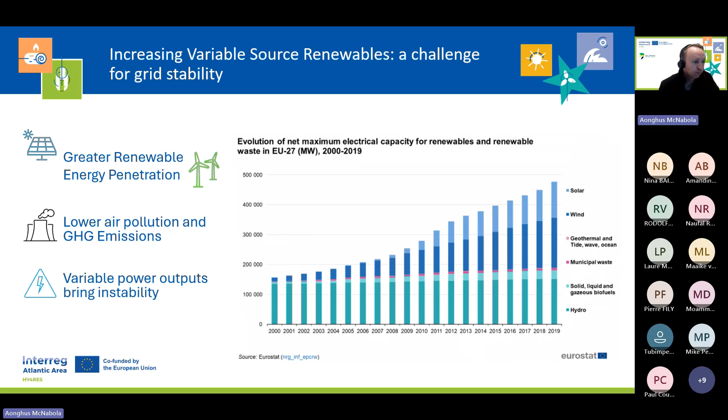But during that time, we had a very high-profile event in Spain and Portugal with power outages related to grid instability that high penetration levels of renewable energy can create if they're not properly managed. And so that proper management of renewable energy in the micro community energy space is where we are targeting. So elaborating on the problem we were trying to address a little bit more.

We have more and more renewable sources in the grid over the last few years, and expect that to continue to be the case. Less conventional energy supply, but also a greater demand for electricity in general. We all see data centers in the news and various other reasons why our energy demand is going up. So not only more variable renewable energies in the electricity grid, but a greater demand for electricity for other environmental policies, such as the electrification of transport and heat, lowering emissions in other ways.

So that means that the challenge of managing the grid, which must always meet demand, becomes more and more difficult, right? So if we think about the dreadful event of a blackout, well, it's not something that happens very often.

And so the challenge of someone managing an energy grid with sources which are much more variable becomes much more difficult in the modern era. So that also is more of a stark challenge in rural areas where the grid is generally weaker.

And so what essentially we mean by that is, if you think of the grid or the arteries of our electricity system as they spread to rural areas, they tend to be towards the end of the line, and the capacities are smaller to carry local energy. And so it's a different challenge to manage variable renewable energy sources there than it is in big cities. And that is where HY4RES focuses, on hybrid solutions at local community level.

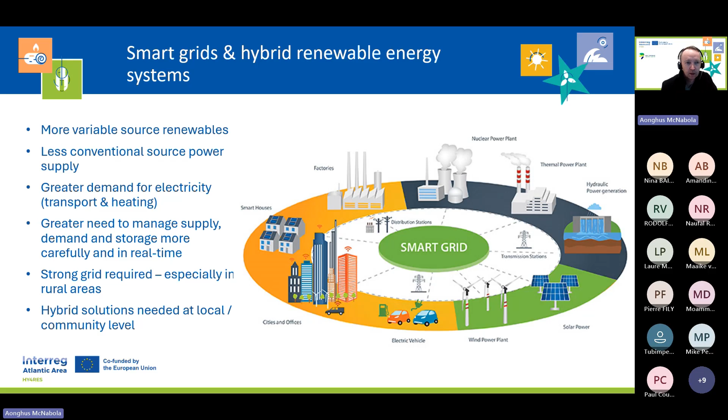There is also a geographic dimension, as I hinted at the start, to this problem. So we are part of the research response to the policy position here through the Interreg Atlantic Area Programme, which has a focus on largely rural areas in the Atlantic area of Spain, Portugal, France, and Ireland. And the amount of renewable energy resources in terms of wind and solar and hydro are different in those places. So the same solution doesn't work in all of them.

But one of the common challenges which we need to come up with for all is really focusing on the management of that renewable energy. So not necessarily on the design of a new wind turbine, but the management of that power. So we focus heavily on digital solutions to allow us to manage different sources of renewable energy together. And then we also focus on the design of those systems such that they are low cost and affordable, right? So the affordability of renewable energy is an important aspect of the just transition and other considerations which we have to keep sight of.

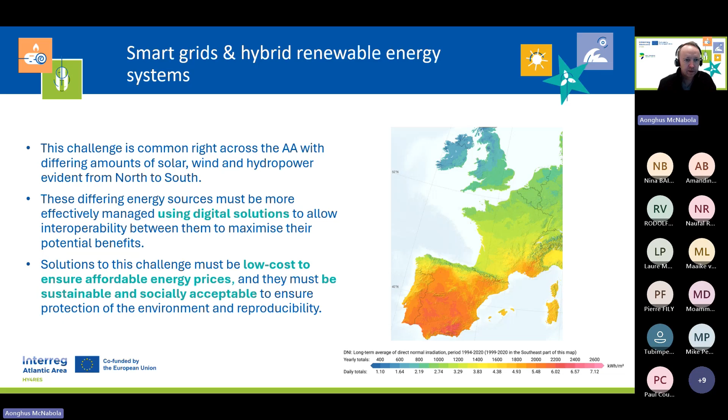Okay, so for that reason, a focus of the project is on the development and demonstration of hybrid renewable energy systems. We focus on low-cost sustainable energy storage, and also balancing the variable amounts of wind, solar, and hydropower that are available in different settings.

And to make the project have an achievable 3-year remit, we focused particularly when we started the project in 2023 on 4, let's call them energy sectors, which were common across the 4 countries involved, and of economic significance. So that being agriculture, ports, which are obviously a large part of the Atlantic area, aquaculture, and community energy schemes. So we focused our development of hybrid renewable energy system design and energy management on those areas.

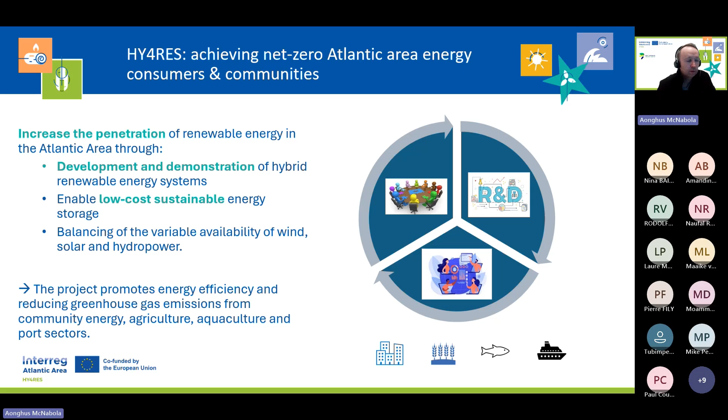Okay, so coming up next, yes. So the project is going to focus again, as I was mentioning, on low cost and sustainable power systems. It also includes the development of an intelligent renewable energy management software system, which we're not going to hear an enormous amount about today, but later in this series of webinars we will get into. Today we'll focus more on the demonstration of the technology.

So the project research on the technical side had two main focuses. First, if we were to take a hybrid renewable energy system that involved solar, wind, energy storage, and hydro, like the icons here, how would we design that? How would we size it in different settings? And then once it's in place, once it's sized for the appropriate resources of those energies available in the location, how we manage that effectively through data monitoring and then management of how much of each power to use.

So a key part of the project, aside from desk-based research, was also to do this in practice through demonstrating the technology to show people how we could install low-cost sustainable technologies, and what the viability of that would be, and what were the technical challenges, and so on and so forth. And again, the video at the beginning showed how we were doing that, and so here's again a short summary of these.

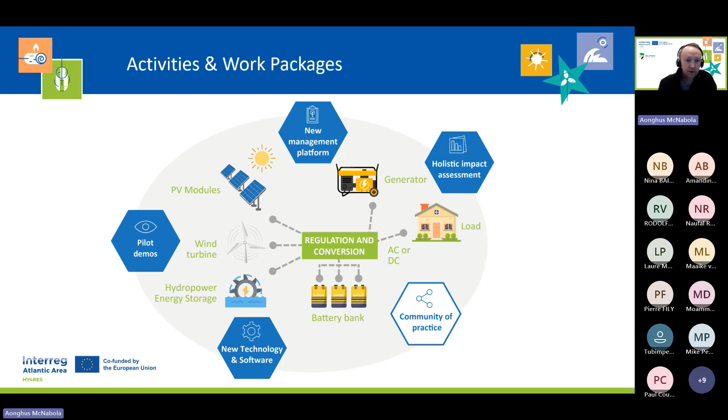We also conducted in-depth environmental and sustainability impact assessment on each one, to measure the life cycle impact and the social impact of these interventions. And throughout all of that, we had a community of practice to co-design the technology.

Okay, now, last of all, Paul mentioned at the start that we were quite an interdisciplinary team of partners. There's a little bit more on us here. So we are 9 partners. Trinity College Dublin was the lead partner. We have the University of Cordoba in Spain, AC3A in France. Well, maybe, since I have 3 minutes, I'll mention what each partner brings. Trinity College Dublin had significant experience in leading European projects, as well as in hydropower and the concept of using communities of practice for research translation.

University of Cordoba are leaders in irrigation technology, and also the energy efficiency of that. AC3A, based in France, have some expertise in the agriculture sector, particularly reaching stakeholders in that area, and science communication in general. And they are helping us with this webinar today. Thank you to the AC3A team.

University of Oviedo in the north of Spain bring expertise in small hydropower systems and renewable energy in general. Fenacore, our representation of the irrigation community as an industrial association. Easy Hydro in Ireland, a company involved in hydropower production and design. IST, University of Lisbon, with expertise in water systems and hydropower. IG Energy, also in Portugal, a small company in renewable energy systems. And finally, Vertigo Labs in France, who lead our life cycle assessment and environmental and social impact work.

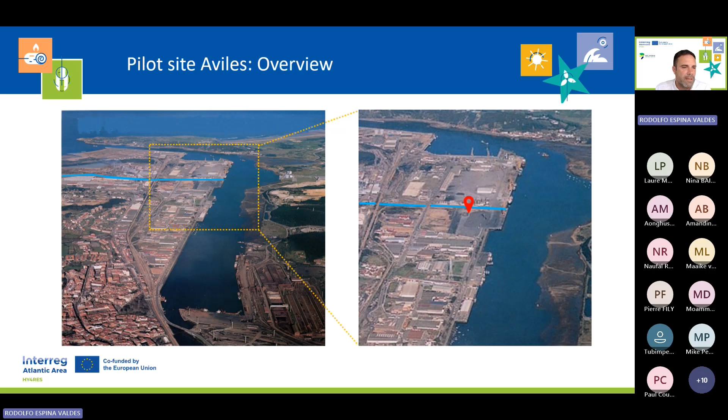And on one side of the port, there is a river, and we can use the stream of the river and the movement of the tide, and we can get some part of our energy from hydrokinetics. So the overview of the pilot: in the Avilés pilot, we developed a hybrid energy hub that combines several technologies, for example, solar photovoltaic energy, wind energy, hydrokinetic energy, and a pump-as-turbine system. All these technologies are integrated into a unified system. In addition, the project is not only focused on energy generation, but also on monitoring and smart energy management using IoT technologies and communication protocols such as MQTT.

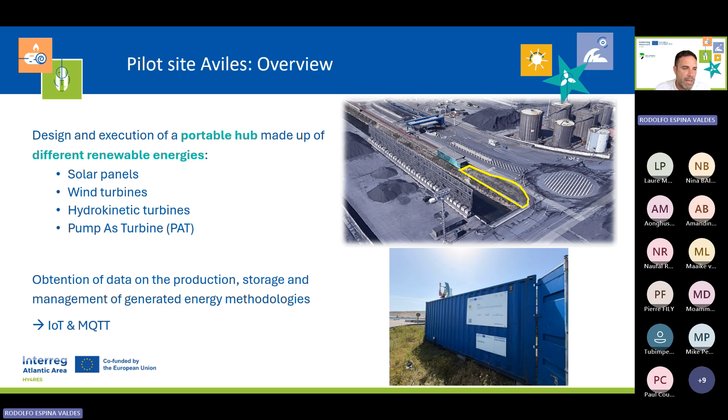One of the most important aspects of the pilot is its multi-resource approach. The port environment of Avilés is particularly suitable because it provides access to solar radiation, coastal wind conditions, water flows from the river and tide, and hydraulic infrastructure. By combining these resources, we can improve system robustness, reduce intermittency, and increase overall energy availability.

Regarding the photovoltaic system, it includes 3 solar panels with a total power of around 0.81 kilowatts. The estimated production is about 1.95 kilowatt hours per day, or approximately 567 kilowatt hours per year. The system can operate in 2 modes: standalone, using battery storage, or hybrid, connected to the electrical grid. All energy parameters are monitored in real time through the IoT system.

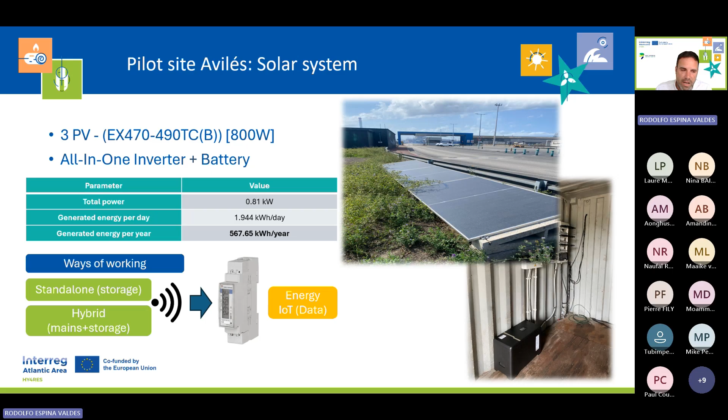In the case of the hydrokinetic energy, we deployed 2 turbines on a floating platform. This solution allows us to harness water flow without requiring large infrastructure. The energy output is more modest. Total power is about 20 watts, and the annual production is roughly 135 kilowatt hours. However, its value lies in resource diversification and its ability to operate continuously under suitable conditions.

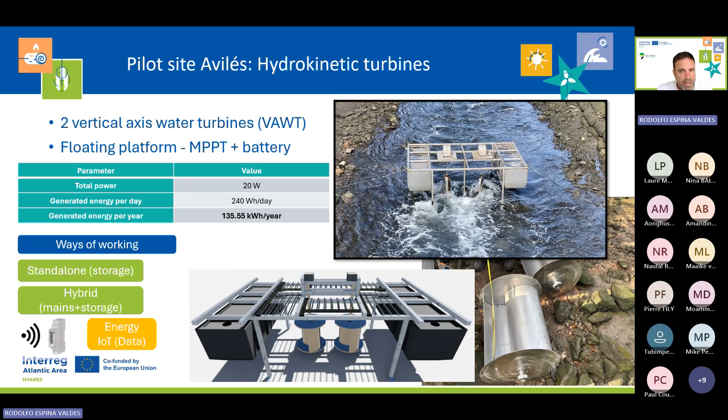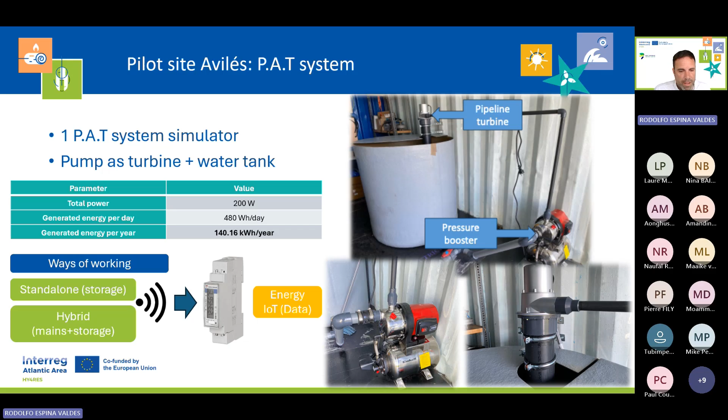Another innovative component is the pump-as-turbine system. A conventional pump is used in reverse as a turbine, integrated with a water tank. The system serves both as a generation unit and a form of renewable energy storage. It provides around 200 watts of power and about 140 kilowatt hours per year of energy production. All these subsystems are integrated into a hybrid architecture that includes multiple renewable sources, battery storage, and of course, capability for grid connection. This allows us to optimize energy usage depending on resource availability, demand, and system conditions.

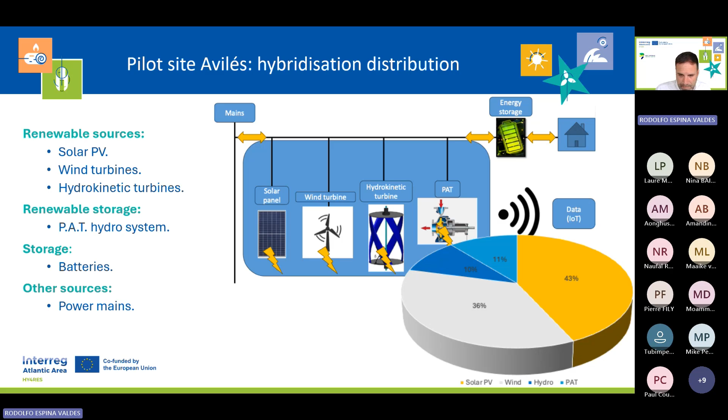A key feature of the pilot is digitalization. The system incorporates an Internet of Energy layer, which enables wireless access to data, real-time monitoring, tracking of variables such as power, production, and system status, and we are also exploring advanced functionalities such as predictive maintenance, operational optimization, and intelligent hybrid energy management.

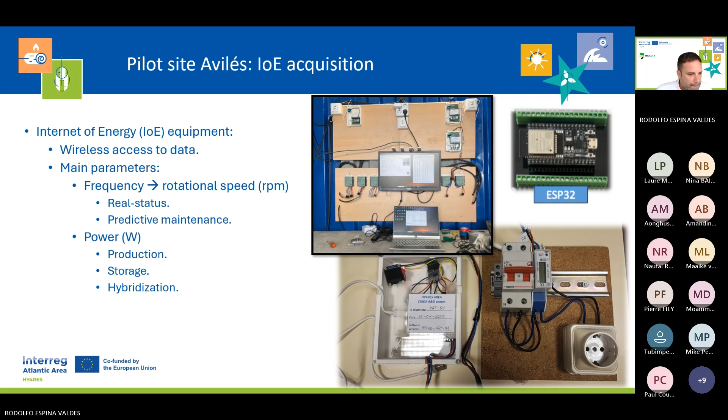And as the conclusion, in summary, the Avilés pilot demonstrates the feasibility of a system that is hybrid, modular, portable, and based on multiple renewable energy sources. These types of solutions are especially relevant for port environments, industrial infrastructures, and scenarios where energy resilience is critical. Furthermore, the integration of digital technologies enables the transition toward smarter and more efficient energy systems.

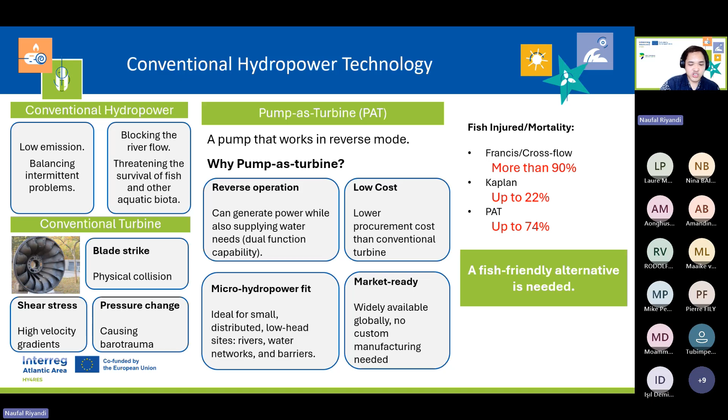So what is fish-friendly design? Fish-friendly means that we allow fish to pass through the machine safely with minimal injury or mortality risk. This design requires avoiding sharp blade geometries, and the turbine can be operated at low rotational speeds. And as you can see on the right side of the slide, based on our literature review, conventional turbines or PATs can cause serious harm like physical wounds, scale loss, fin tears, and internal injuries.

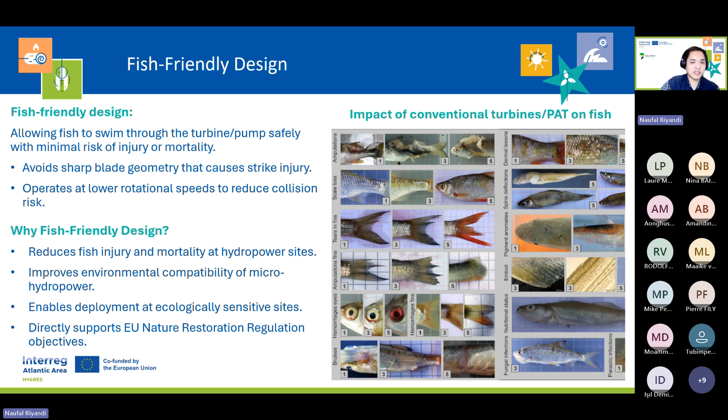That's why fish-friendly designs could reduce this risk and improve the environmental acceptability of micro hydropower. And using fish-friendly designs, we hope to enable deployment at ecologically sensitive sites and directly support the EU nature restoration regulation. So the technology we are focusing on is the centrifugal screw pump-as-turbine, or CSPAT, as our fish-friendly technology. The CSPAT itself is a centrifugal pump, but with a screw-shaped impeller that operates in reverse to generate energy.

CSPAT was originally designed to transport water and live fish without causing harm. So the fish friendliness is built into its design. We can see that from the injury rates in pumping mode, which have been reported at less than 3%.

However, why we also chose this CSPAT is that besides the fish-friendly design, it also has a low cost and is commercially available. So it possibly will suit as a barrier modification strategy under nature restoration regulations. However, until this research, its turbine performance had never been studied.

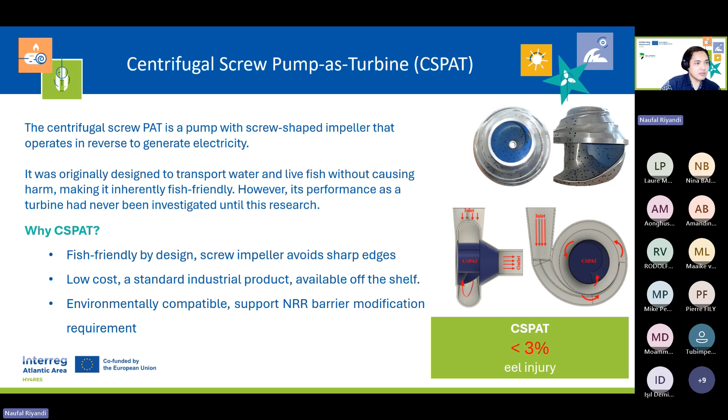So within the HY4RES project, we conducted the first comprehensive study of centrifugal screw pump-as-turbines combining one-dimensional analysis, laboratory experiments, and CFD simulations, with the goal of knowing the CSPAT performance. In this project, we tested 3 variants of the CSPAT: the 2 smaller units, CSP1 and CSP2, and 1 larger unit, CSP3.

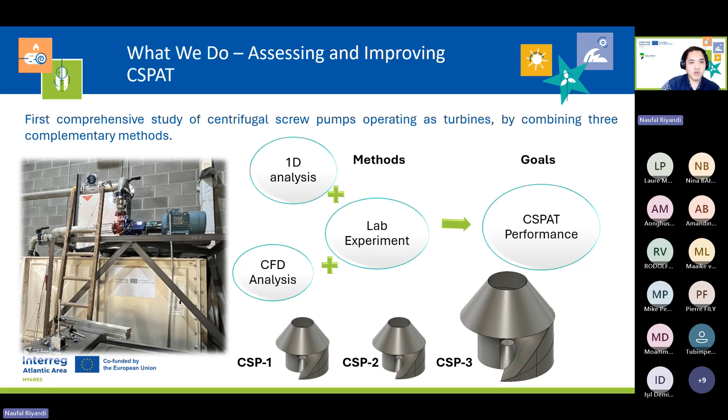Our key finding is that the CSPAT is technically possible for micro hydropower adaptations. The CSPAT can generate up to 12.5 kilowatts with an efficiency around 33% with the larger size, CSP3. The performance is lower than conventional PATs, which exceed 60%, but this is a meaningful result for a previously uncharacterized technology.

Also for the rotational speed, all of the units operated at 800 RPM, a deliberate trade-off that reduces fish injury risk at some cost to efficiency. The performance is also highly sensitive to flow rates, heads, and rotational speed. So we need to be careful when choosing the sites where we want to apply this technology.

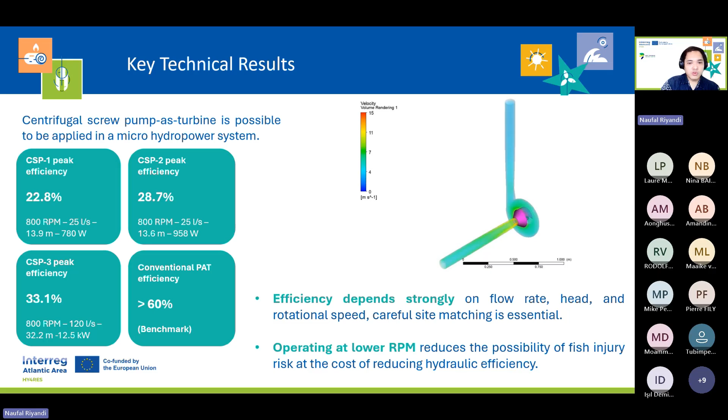So connecting to policy, the CSPAT is potentially an enabling technology for sites where we need energy and also need ecological restoration. And it can contribute to the EU's 42.5% renewable energy target. Sorry, yeah, this is the slide.

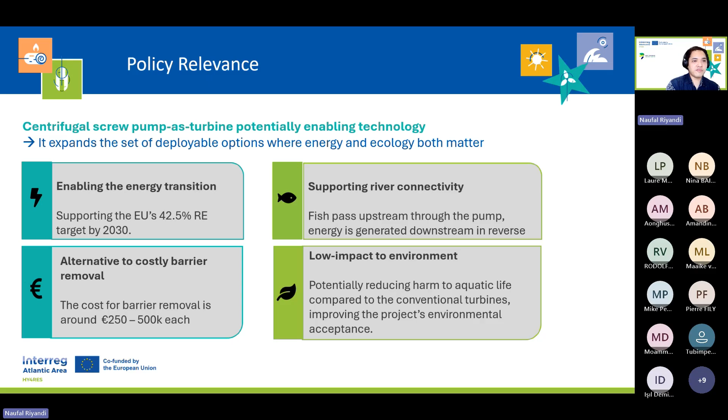And we know that removing barriers also has quite high costs. So we need an alternative, and we can use this technology as a barrier modification. When doing the barrier modifications, this technology can also support river connectivity, and because it supports river connectivity, it can support the ecosystems, so it has low impacts on the environment.

To conclude, the CSPAT is a potential pathway for sustainable hydropower, and it can serve as a barrier modification strategy, which can generate up to 12.5 kilowatts at around 33% efficiency, while maintaining river connectivity and preserving aquatic ecology. The performance is currently lower than conventional PATs, but there is clear scope for improvement through design optimization.

So we can conclude that fish-friendly PAT is potentially a clean technology for generating clean energy from rivers without compromising the ecosystems those rivers support. I think that's it for the presentation.